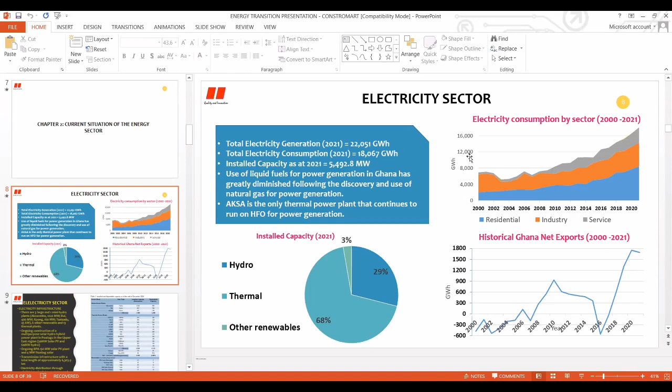Okay, so we'll look at the current situation of our energy sector. I won't bore you so much, so this is the overview as at 2021. We all know thermal takes a chunk of our generation - hydro is about 29%, thermal is about 68%, and renewables, which we consider the current clean energy generation, is only 3% in terms of installed capacity.

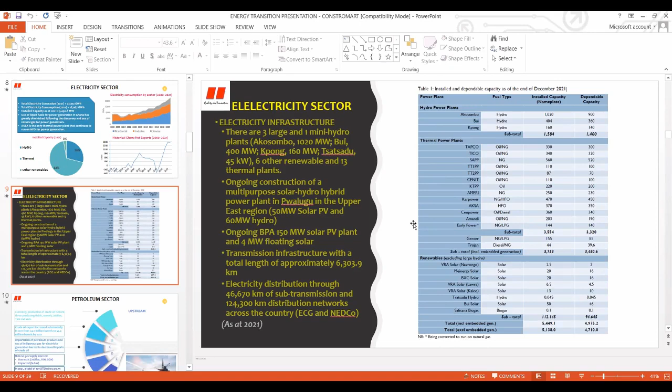This is also the structure of the generating plants we have. If you look at the thermal sector, we have a lot of plants, and if you look at renewables, even though we have a couple, it's not that much. Same with hydro - we know our current hydro plants at Akosombo, Bui, and also the Kpong plant.

With the petroleum sector, we looked at the upstream, where we have all the exploration and production. This is a couple of the production fields we have: Jubilee, TEN, and SGN. We actually had substantial crude export growth since 2011, from 24.7 million barrels to 55.4 million barrels by the end of 2021.

We also have natural gas supply domestically - we're looking at Jubilee, TEN, and SGN, and we also know that we import natural gas from Nigeria.

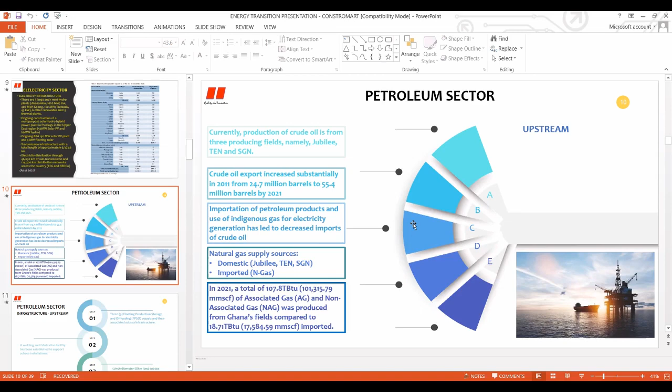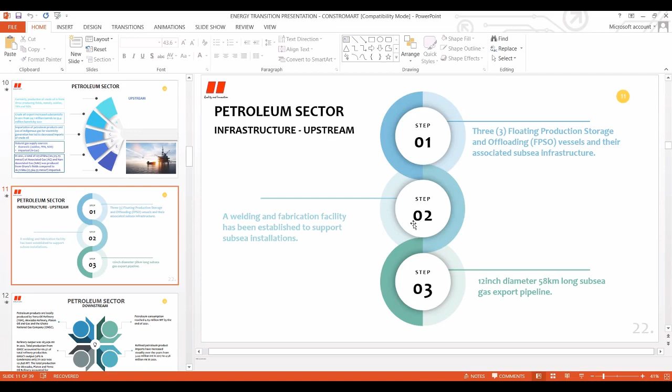So on the petroleum sector, looking at infrastructure, we're looking at the investment we've had in infrastructure. We have the floating production storage and offloading - the FPSO vessels - and associated subsea infrastructure. We also have a welding fabrication facility established to support the subsea work, and the subsea gas export pipeline.

So because of time, I'll just quickly move on - I'll share the slides with the team so you can have access to them.

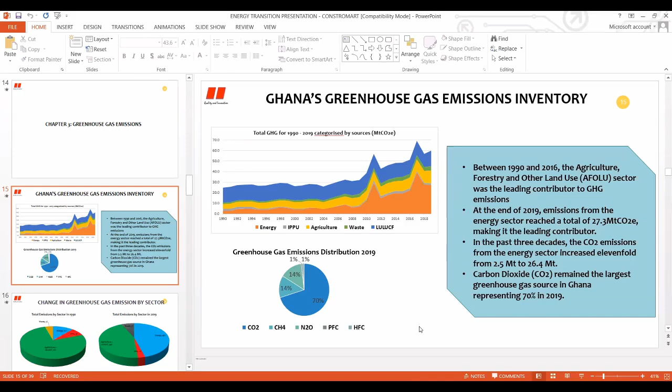We also took our time to go through emissions from 1990 to 2019, and we realized that in the past three decades, CO2 emissions from the energy sector increased 11-fold, from 2.5 million tons of CO2 to 26.4 million tons of CO2 emitted. We realized that carbon dioxide remained the largest greenhouse gas source in Ghana, representing about 70% in 2019.

This is also another breakdown in emissions. Initially, total emission by sector in 1990, we realized that the agriculture sector was contributing a lot of these emissions - this was as at 1990. But in 2019, we realized that the energy sector was competing with the agriculture sector - energy was contributing about 46%, and agriculture about 45%, which is a key concern that we look at the practices that we are doing in the energy sector.

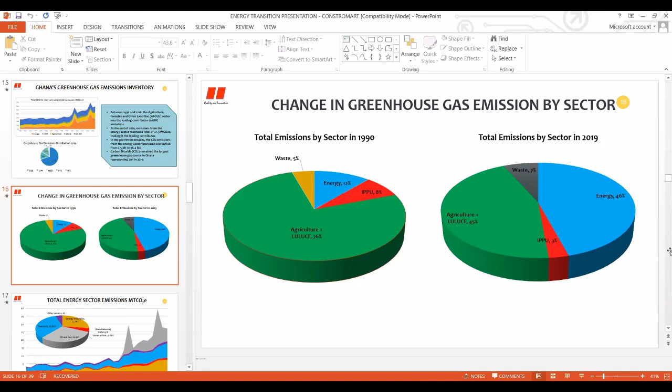So we also eventually looked at the energy sector, and had to dissect the contributions within it. We looked at manufacturing, industry and construction, transport, other sources, and we also looked at oil and gas, as I've already shared some time there.

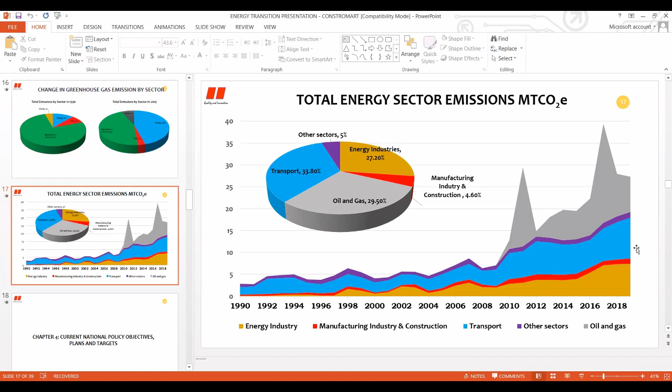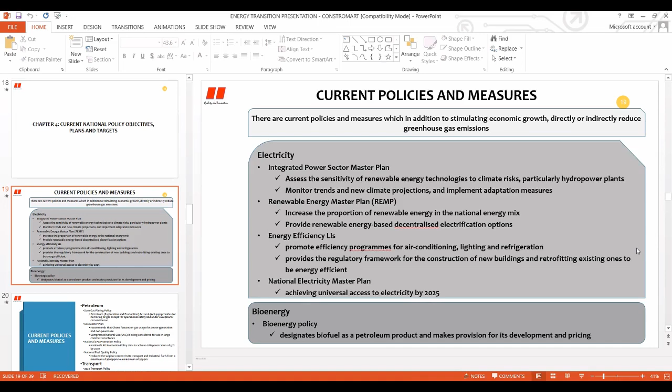Okay, so there is a plan also on bioenergy. In the petroleum side, just like we saw in the graph before, a lot of things were being done. And when we started the exploitation of the oil and gas sector, we had a lot of gas flaring, which was contributing to these emissions.

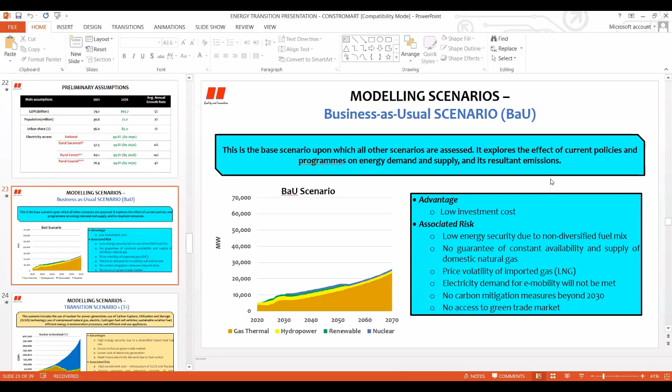Let's look at the first scenario, or the T1 scenario.

That's a transition scenario. In the T1 scenario, as you can see, there is significant investment in nuclear power. So let me read the preamble. This scenario includes the use of nuclear power for generation, carbon capture utilization and storage technology, compressed natural gas, electric and hydrogen fuel cells, sustainable aviation fuel, efficient energy transformation processes, and efficient end-use appliances.

So this scenario actually considered a lot of the investment in strategies or technologies that we consider as clean. We brought everything on board.

Nuclear power has a very high availability. That is, if you invest in, let's say, 100 megawatt nuclear, you're going to get about 90 megawatt of power from it. I think it has the most availability in terms of the energy you are getting.

Solar, for example, has an availability of about 23 or 25%. Some R&D has gone into solar that makes it about 30%. So when you invest in 100 megawatt solar, you are actually getting about 30 megawatt from it. Hydro, depending on availability of your reservoir or inflows to it, sometimes is very high, sometimes very low. And gas thermal also has its own availability due to fuel, and sometimes you're exposed to those risks.

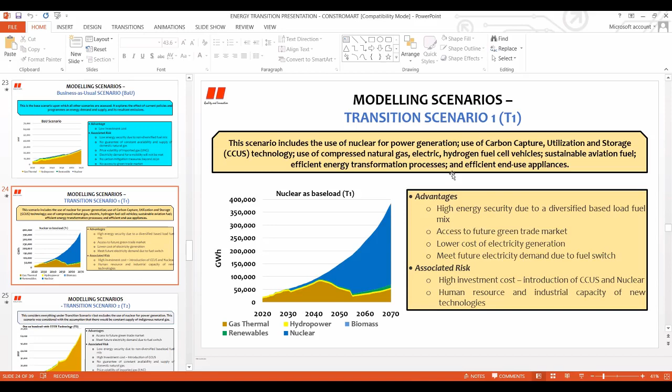Some of the risk is that this carbon can leak, and it can get back into the environment. So the CCUS is being practiced, but at the moment it's not really being commercialized because it's an expensive technology.

The T2 scenario also looked at huge investment into gas thermal. This scenario considers everything under the transition scenario 1, but excludes the use of nuclear. So in this scenario there is no nuclear — you can see there is no blue thing.

This scenario was considered with the assumption that there will be constant supply of indigenous natural gas. But evidently, as we know, recently we heard Gridco saying that even we had some issues with the Atuabo and all that. So it's also a tricky scenario — we may have our own indigenous natural gas, but its availability sometimes is a little tricky. So we considered this as well.

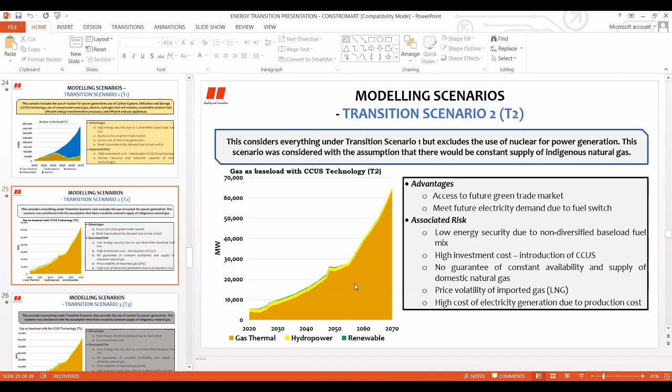The advantage to this is that we can meet future electricity demand due to fuel switch, because now we are using natural gas, I mean LNG, and it is more clean. Natural gas has been considered globally as a transition fuel, meaning it's clean. The associated risk is that there is high investment cost because if we have to continue this, we have to introduce the CCUS technology, the carbon capture utilization and storage.

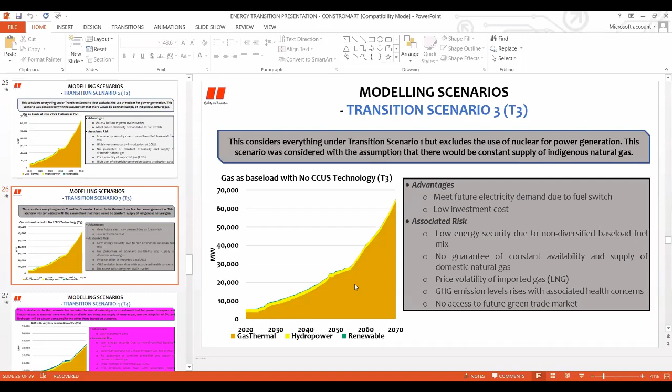The T3 scenario considers everything under transition scenario 1, but excludes the use of nuclear power. This still excludes nuclear power. This scenario was considered with the assumption that... let's go to T4.

The T4 scenario is similar to the business-as-usual scenario, but includes the use of natural gas as a preferred fuel for power. So in this case, natural gas is preferred — you can see that the base load for the country is just natural gas, preferred for power, transport, and industrial use. This scenario assumes reliable and adequate supply of natural gas and the adoption of electric vehicles and hydrogen will be slower compared to the other three transition scenarios.

The advantage is that since natural gas is internal, it is a low investment because we have control over our processes, we have control over our own resources.

Some of the associated risk is that electricity demand for e-mobility might not be met, because countries that are really adopting e-mobility are seeing spikes in their electricity use, as you're not able to control the appetite of your citizenry in terms of electricity. People may be buying very huge within a short time, and that may not be considered in your annual average demand. You might be exposed to those kinds of things because everybody might be charging his or her vehicle within a shorter time, so sometimes the consumption is not a steady trend.

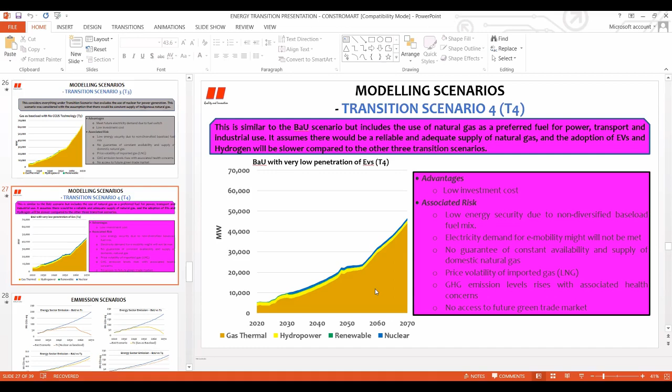There are associated risks to this scenario too, and there's price volatility of imported gas. For example, if it's indigenous, you have control. If you're importing from elsewhere, you don't have control over it, so you're exposed to that volatility in terms of your gas.

So let's look at the emission scenarios for all these scenarios. We first consider the BAU, the business as usual scenario, along with the transition one scenario. We realize that using nuclear as the base load, the blue line, as you can see, is actually the business as usual in all these scenarios. If you look at the business as usual, emissions continue up - you can see a steady rise in emissions.

When we compare it to T1, we can see that the strategies being adopted are bringing down the trend. That is what we're looking at as net zero. Net zero is essentially - it's not that you are not going to emit, you are still going to emit, but the strategies you're doing are reducing your emissions, bringing it down.

So in the T1 scenario, we can see there is a decline somewhere, because the investment in nuclear is going to be very high from, let's say, 2040, somewhere around 2052 to 2070, we see a sharp decline in emissions. We see the same for T2, that is using gas as the base load - we also see another decline, right?

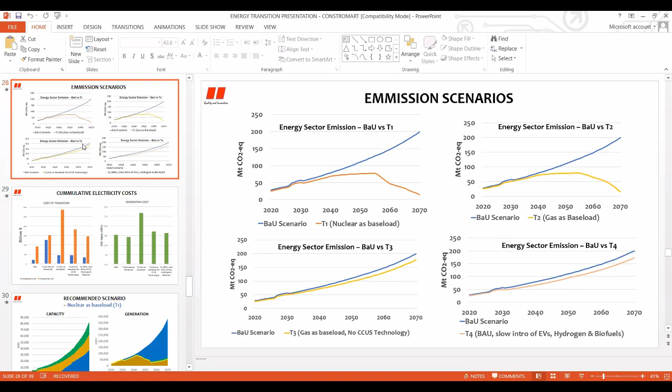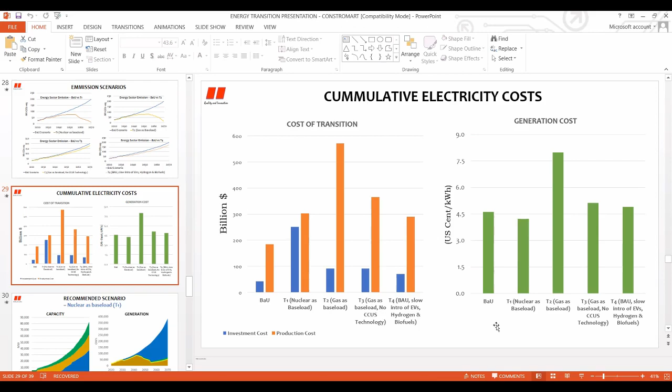So after everything, if you look at the graphs critically, what the team considered was to look at the T1 scenario. The T1 scenario, as we can clearly see, considers a significant investment in nuclear, also with natural gas and renewables.

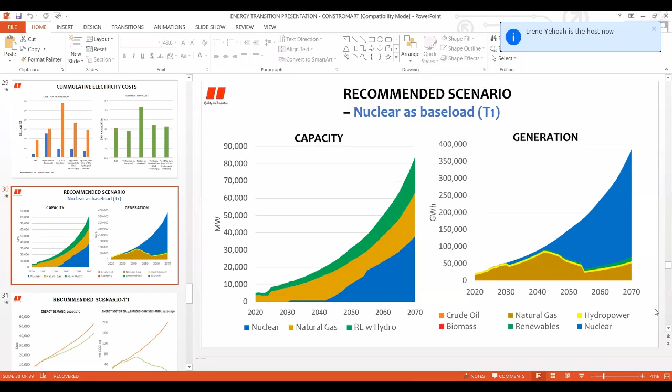We considered renewable, even though it is intermittent, but it's a clean source. But we're also looking at the base load, which is supporting our industrialization agenda. So in terms of capacity, we are looking at a capacity of about 80,000 megawatts by 2070. And we are looking at total availability of energy around over 350,000 gigawatt hours by 2070. That gives a lot of security for our energy sector.

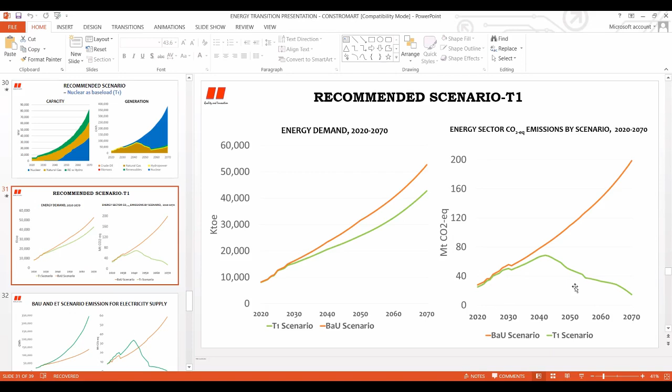And so we looked at the emissions related to, just like we saw in the graph, we realized that in the T1 scenario, we had a lot of reduction in demand, even reduced the country's demand. And also we were making significant contribution in terms of the emissions.

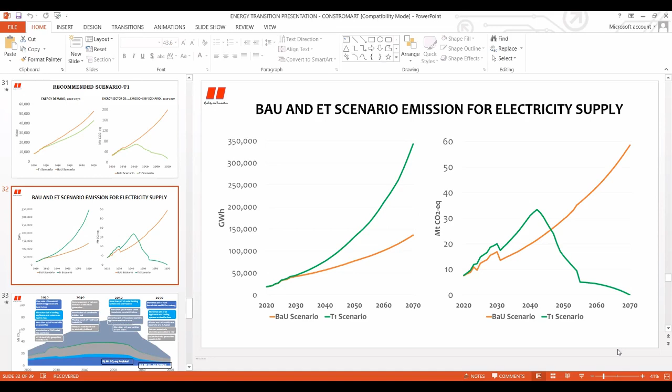And so we also considered, in terms of electricity, a comparison between the business as usual and the energy transition scenario for the recommended transition scenario T1 that we had.

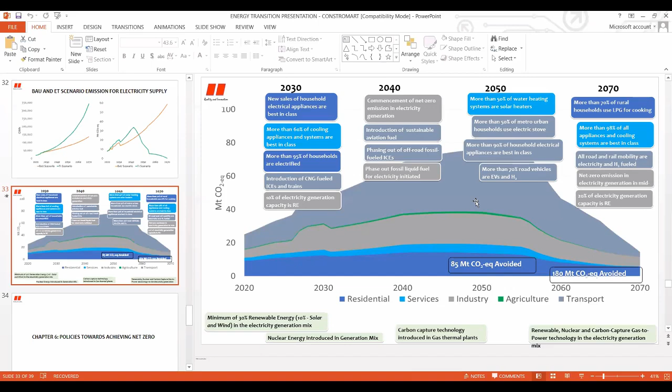And finally, these are some of the strategies that we are looking at. What are we going to do in 2030? What are we going to do in 2040? What are we going to do in 2050? What are we going to do in 2070? So as you can see, there are strategies for 2030, 2040, 2050, and 2070. I can't take you through all of it because of time, but for your contributions.

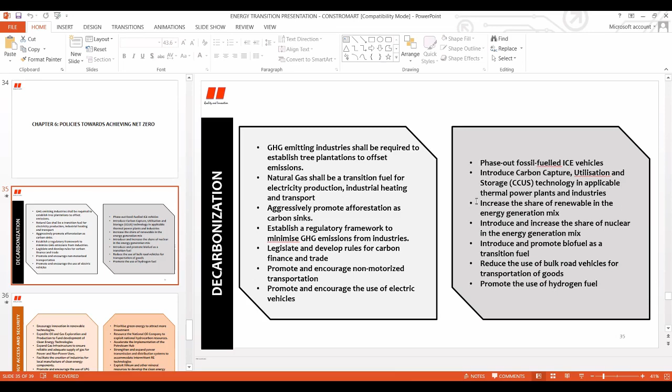So these were some of the recommended policies that we had, a lot of recommendations for decarbonization. If you take your time to go through, these are some of the policies we are looking at with regards to decarbonization, policies and strategies that are going to support decarbonization for the country.

We also had policies and strategies for energy access and security. For example, we're going to prioritize green energy to attract more investment, have the National Oil Company exploit national hydrocarbon resources to accelerate development. For energy efficiency, these are some of the strategies that we propose.

So, in brief, and not to take up too much time so we can have some time for questions, this is what I have for the team. And thanks very much for your attention.